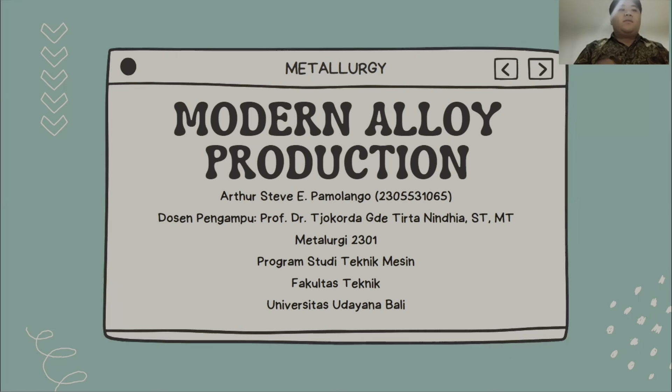I'm a student of Udayana University from the Mechanical Engineering program, and today I want to present to you my metallurgy course assignment named Modern Alloy Production. The book source that I use is Metallurgy for the Non-Metallurgist, second edition.

The first is the effect of alloying on solidification. The solidification of alloys is more complex than that of pure metals because the different elements in the alloy possess different melting temperatures. Pure metals freeze and melt at specific temperatures. Alloys freeze and melt over a temperature range.

The result is the so-called mushy zone for alloy solidification under equilibrium conditions. The mushy zone represents the temperature extremes between which a two-phase solid/liquid composition is present.

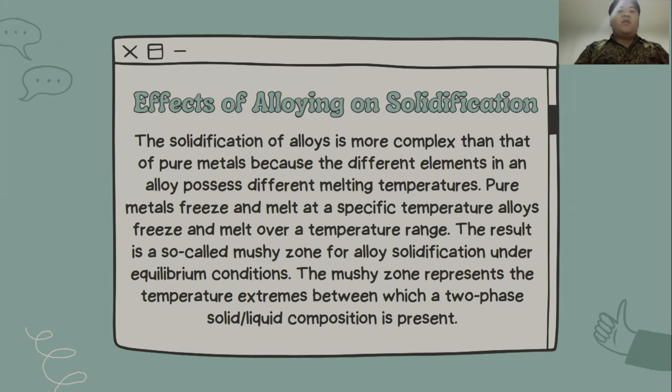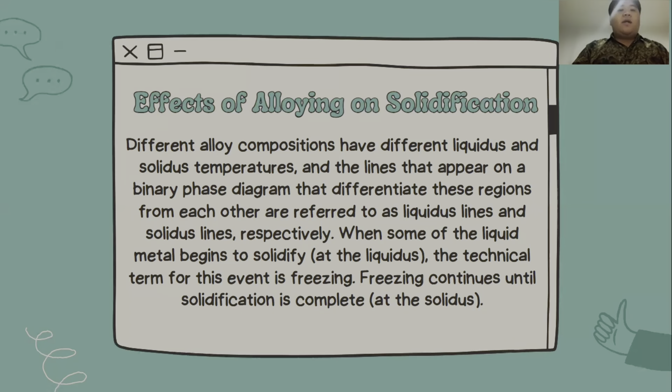Different alloy compositions have different liquidus and solidus temperatures, and the lines that appear on the binary phase diagram that differentiate these regions from each other are referred to as the liquidus line and solidus line respectively. When some of the liquid metal begins to solidify, at the liquidus, the technical term for this event is freezing. Freezing continues until solidification is complete, at the solidus.

Second is solidification structure. During the early stage of solidification, the microstructure of a cast alloy can be altered from a dendritic structure toward a rosette or spherical morphology. Forced convection, currents, or mechanical agitation increase shear and turbulence in the liquid, which promotes the solidification of the globular semi-solid structure. However, recent research and development shows that it's not necessary to use shear force to produce the globular semi-solid structure.

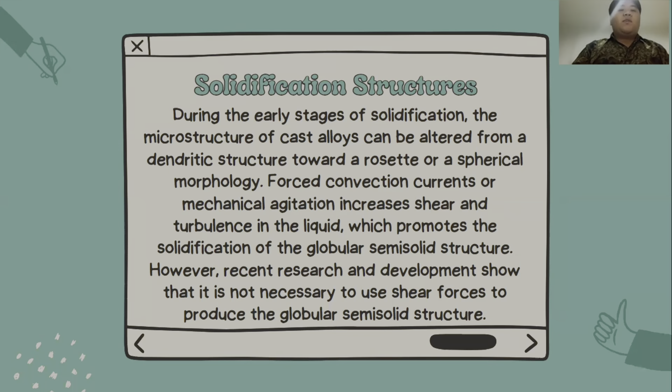Instead, a slurry with an ideal semi-solid structure can be produced directly from the melt if the temperature of the melt is such that many nuclei, or copious nucleation, are generated, and if the nuclei do not grow past a certain point, suppression of dendritic growth, or melt back into the bulk liquid. This controlled nucleation and growth concept is the genesis of various processes and methodologies to generate semi-solid slurries from the liquid state.

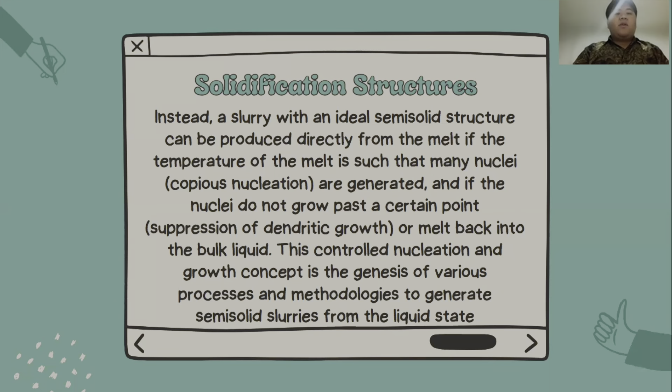Next is melting furnaces. One of the furnaces most commonly used to melt steel alloys is the electric arc furnace, or EAF. A typical EAF is a refractory-lined vessel with a bowl-shaped hearth that is covered with a retractable hemispherical roof.

Induction furnaces have become a widely used means for melting ferrous alloys and increasingly non-ferrous alloys as well. A wide range of metals can be melted with this type of furnace, although little refining of the metal is possible. And the last one is the crucible furnace. The crucible furnaces of antiquity were in the form of well-fired clay pots and gave early metalworkers the ability to melt metal in a durable container that could then be used to pour molten material into a mold.

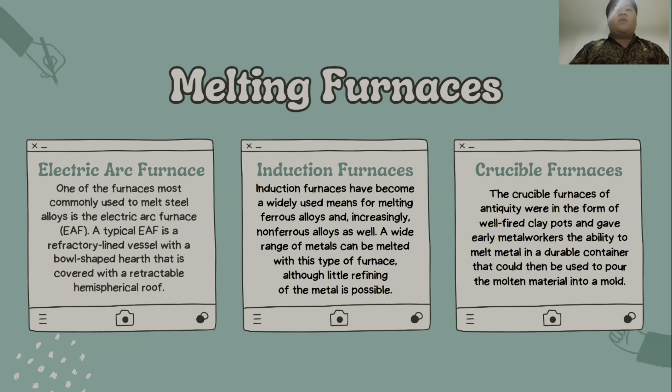Molten metal processing. Molten metals are processed and handled in various ways depending on the alloy and melting practice that are used. Melting is a basic way of combining elements for the purpose of alloying, and the overall chemical composition of the molten alloy must be carefully controlled and processed before casting can take place. The reactivity of molten metal at high temperature also requires special processing techniques for removing or preventing the formation of inclusions, impurities, or dissolved gases in the melt.

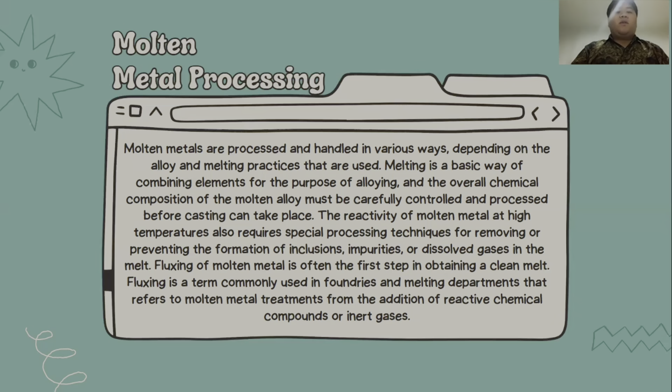Fluxing of molten metals is often the first step in obtaining a clean melt. Fluxing is a term commonly used in foundries and melting departments that refers to molten metal treatment and the addition of reactive chemical compounds or inert gases.

Primary production casting. Static ingot casting. Several ingot casting processes have been designed and developed for downstream manufacturing processes. The most common is static ingot casting, where molten metal is poured into a vertical open mold. The mold is made of metal, usually cast iron, and is tapered along its length, so the solidified metal can be easily withdrawn from it.

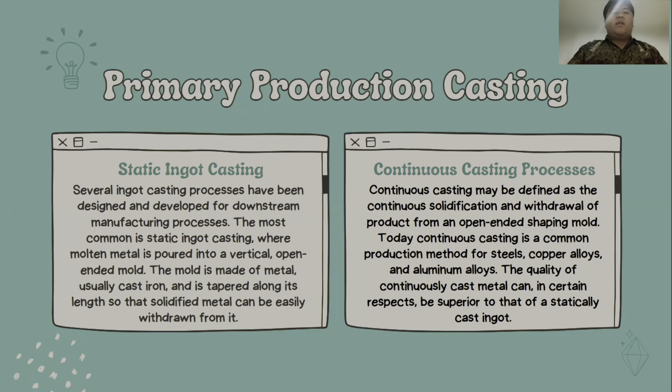Continuous casting process. Continuous casting may be defined as the continuous solidification and withdrawal of product from an open shaping mold. Today, continuous casting is a common production method for steel, copper alloys, and aluminum alloys. The quality of continuously cast metal can, in certain respects, be superior to that of the statically cast ingot.

Foundry casting. Casting with expendable molds. Casting with expendable molds provides tremendous freedom of design in terms of size, shape, and product quality. Expendable mold methods are classified further as expendable molds with permanent patterns and expendable molds with expendable patterns.

Permanent mold casting. Permanent mold casting is particularly suitable for high-volume production of castings with a fairly uniform wall thickness and limited undercuts or intricate internal coring. The process can also be used to produce complex castings. Die casting. Die casting is generally limited to metals with low melting points. However, high-pressure die casting is one of the fastest methods for net-shape manufacturing of parts from non-ferrous alloys.

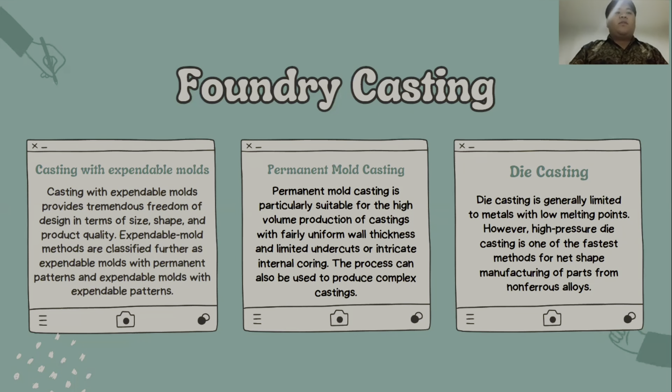Non-ferrous alloy casting. Aluminum casting alloys are the most versatile of all common foundry alloys and generally have the highest castability rating. As casting materials, aluminum alloys have these favorable characteristics: good fluidity for filling thin sections, low liquidus temperature relative to those required for many other metals, and rapid heat transfer from the molten aluminum to the mold, providing shorter casting cycles.

Hydrogen is the only gas with appreciable solubility in aluminum and its alloys, and hydrogen solubility in aluminum can be readily controlled by processing methods. Many aluminum alloys are relatively free from hot short cracking and tearing tendencies. Chemical stability, and the last one is good as-cast surface finish with lustrous surfaces that suffer few or no blemishes.

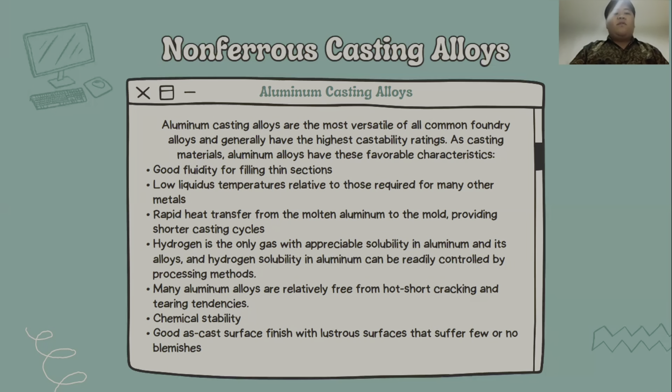Non-ferrous casting alloys. Copper casting alloys. Copper casting alloys are available as sand, continuous, centrifugal, permanent mold, and some die castings. They are generally similar to their wrought counterparts but have their own unique composition and property characteristics.

Magnesium casting alloys. Magnesium castings of all types have found use in many commercial applications, especially where their lightness and rigidity are a major advantage, such as for chainsaw bodies, computer components, camera bodies, and certain portable tools and equipment.

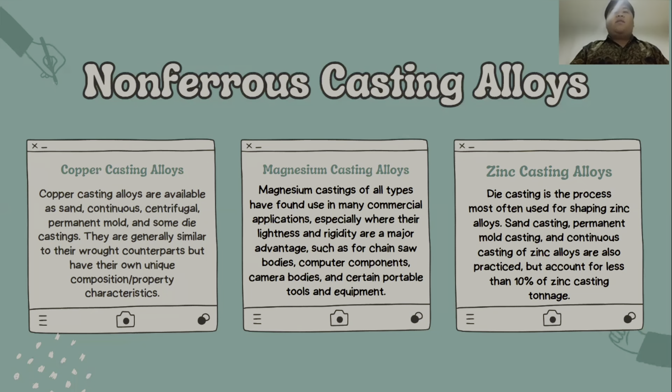The last one is zinc casting alloys. Die casting is the process most often used for shaping zinc alloys. Sand casting, permanent mold casting, and continuous casting of zinc alloys are also practiced, but account for less than 10% of zinc casting tonnage.

And the last one is powder metallurgy. One of the more recent metallurgical developments in the manufacture of modern alloys is the development of powder metallurgy processing. Metal powders can be produced using a wide variety of mechanical methods as well as by chemical and electrochemical methods.

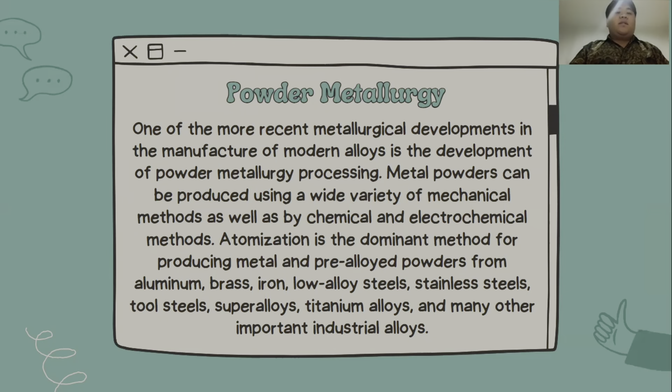Atomizing is the dominant method for producing metal and pre-alloyed powders from aluminum, brass, iron, low alloy steels, stainless steels, tool steels, superalloys, titanium alloys, and many other important industrial alloys.